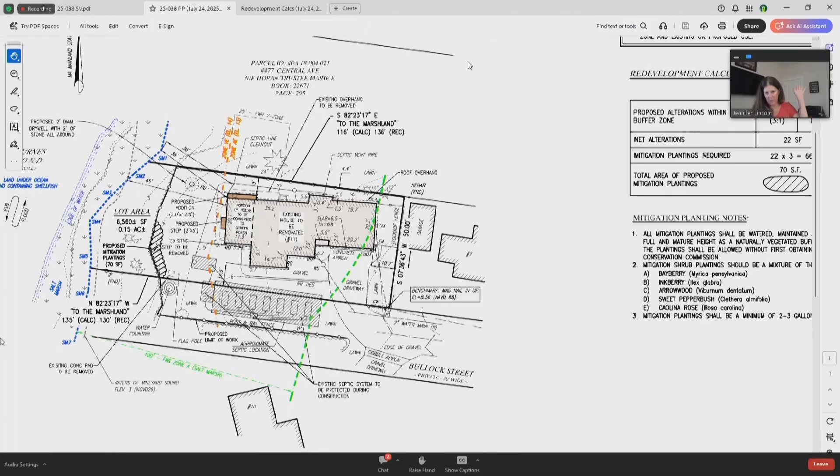And then they would be expanding it by 2 feet to the north. Yeah, I'm talking about the main house, Tim. Yeah, the main house, again, it's interior renovations and then siding and windows. Okay, no additional, no second floor additions to the main house. Perfect. All right, great. Thank you, Tim.

So right, we have the 22 square feet. You're going to do the tree for us, Tim. You described the renovations, and you have explained to your clients that...

I have explained to them that anything they do on this property needs your permission. Any hardscape, landscape, anything will be back before this board. I believe I did send in the email to you guys. They are working with an invasive specialist, so we'll probably be back in the next couple of months for an invasive vegetation management plan between the marsh and the lawn.

Yeah, I think our concern was there didn't seem to be any outdoor living space, patios, decks, and anything off that sunroom would be moving closer. So it would have to be relocated elsewhere on the property. Sure, not a problem. All right, great. Thank you, Tim. I'm all set, Mr. Chairman. Thank you. Thank you, Jen.

Steve, why don't you start us off with questions? Alyssa. No, it seems that they've resolved all the issues with the staff. My issues were whether or not the right of way had any impact on the property, but I have no other questions.

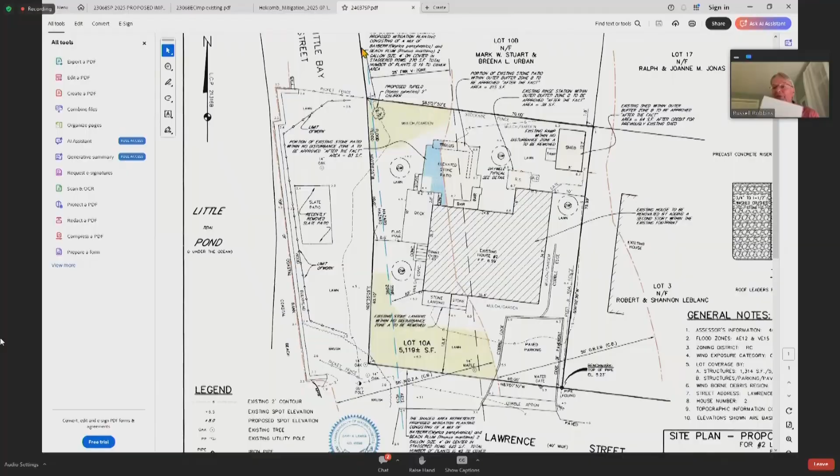Thank you, Mike. Jen: Yes, Mike, so you're gonna put the salt marsh on the plan.

You're gonna be really pressed for room for mitigation at that 3-to-1, but see what you can do for us on that. Have you had... so you're gonna take care and reorganize the mitigation from there? You've checked off all the only one you didn't address, Mike, was that structural engineer architectural confirming that dwelling can handle that second floor. Can you get something from an architect or engineer?

Greg Ceruni and Rescom is the architect. They have structural engineers on staff. They certainly reviewed that, and that would certainly be reviewed by the building department. But if you could just get us something, if they've already reviewed it and it's in-house, that would be great. I can have Rescom send you a letter. Just a quick letter. We do know the building department does that, but it has been a practice of this board to require that because there have been several instances over the years.

The chair and I were talking this afternoon about how we'll approve something and then next thing you know, it goes to the building department and a new foundation is needed, it's not structurally sound. The next thing you know, the houses are cribbed up or taken down and we're not part of that conversation. I do remember one specifically where we stopped the project because they were pouring a new foundation and it was delayed for several months. So we just kind of want to avoid that if possible.

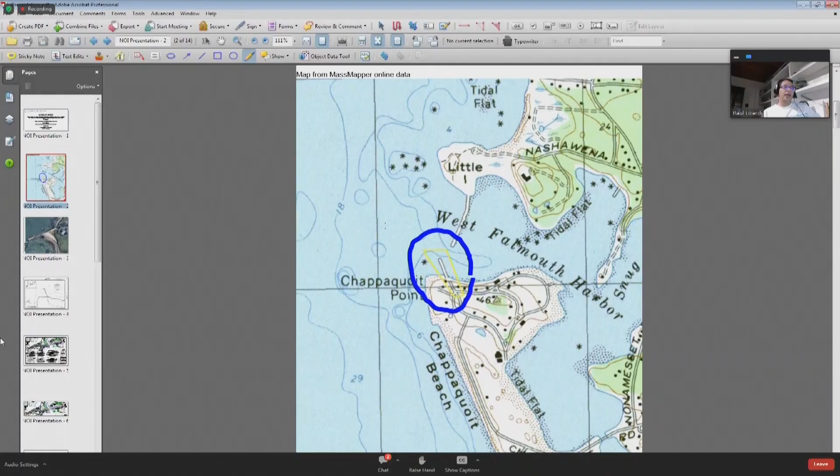Most of you, if not all of you, are familiar with Chappaquoit Island. On the northwest corner, jetting towards the north, is what the neighborhood calls the Big Pier. It's a stone pier that jets into West Falmouth Harbor, and in tandem with a jetty off of Little Island, is kind of like the gate between Buzzards Bay into West Falmouth Harbor. From an aerial image, this is what that pier looks like.

Associates Road is that way, and this is the easement or way, the actual way to get to the pier. The pier itself is on this property, which is 20 Associates Road, but there is an easement over that portion of the pier for the benefit of the association.

The pier is one of the oldest licenses that I've been involved with. This license dates back to 1891. When that wharf, as it was called at the time, was proposed, it was proposed as a T configuration. The T has a core of granite cut stones, and on the westerly side it has a pile of stones to protect the pier.

So this application was filed as a notice of intent to re-permit, to allow the reconstruction of the stones, not the pier itself. To our knowledge, this pier has not had a major reconstruction of the stonework.

I have been involved in the past, through prior commissions in Falmouth, with improvements to the concrete cap of the main pier, and with introducing some mortar on the south side of the pier to seal it.

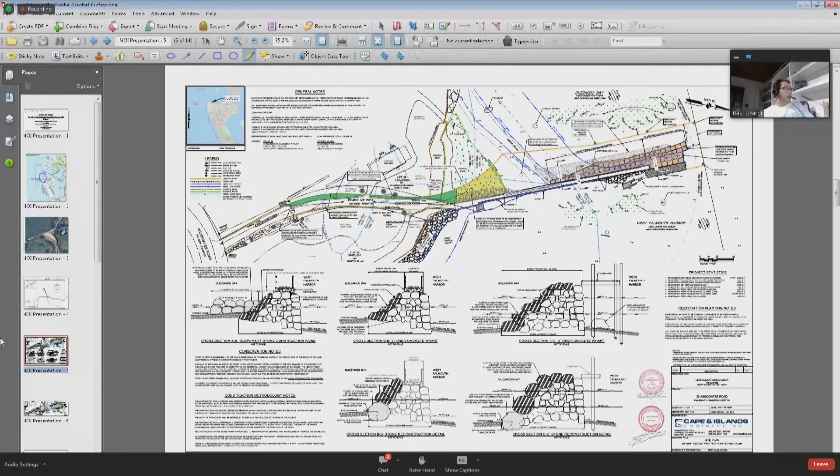So those projects were in the past. What we're doing now is the reconstruction of the actual stone, and I would like to share a couple of photographs of what that stone looks like.

So I met on site with one of the contractors that is likely to do the work, CF Briggs, and I know that's one of the questions staff had. When we met on site, what we found is that most of the stones that make up this face, the outwardmost layer, are kind of on the small side. There are a few larger stones that are the typical size we like to see, but most of them are on the smaller side.

And what this has caused is that when the sands at the bottom of this stonework leave the site and over time come back, some of these stones have been shifting, falling off of the revetment, and in some cases the ones that fell off have rolled over to the east side and collapsed or broken up some of the piles that hold up the timber pier.

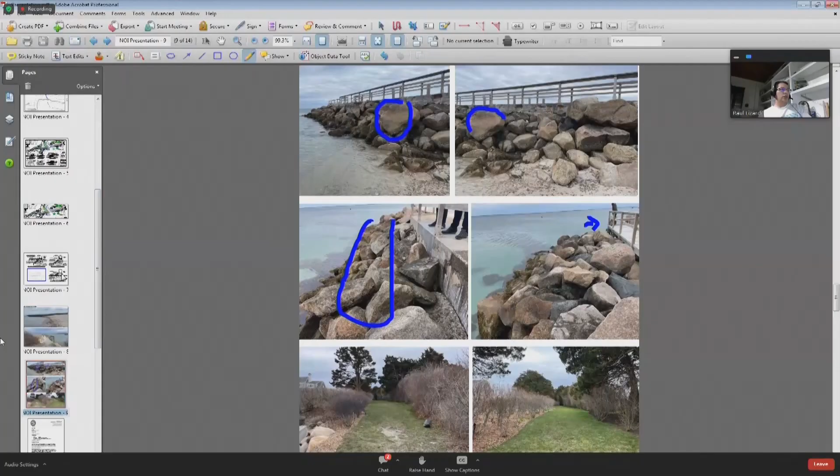So those type of repairs have been before prior commissions already. What we want to do is, I believe for the first time, reconstruct this outer layer. The reason I keep calling it the outer layer is because the core of this wharf or pier, the cut granite stones, are mortared in place. There's concrete with them. So if I switch over to the cross sections, this is what we call the core of the pier or wharf.

There is concrete that connects these stones together. So one of the things we don't want to do is remove the stones that are cemented in, so as not to affect the stability of the pier. What we want to do is remove the outer layer.

What this revetment does not have is a proper toe stone. Similar to a revetment along the shoreline, what we want to do is bring in 10-ton stones and set them below grade all along the length of the site. The site in question is roughly 170 feet from this section to this section.

All of this work is happening within the coastal beach, land subject to tidal action, land under the ocean, and land containing shellfish. We did have an eelgrass survey done. Eelgrass was found and mapped on the plans to the west, and then to the east down here. No work is proposed on the east side of the pier. All of the work is proposed on the west side.

I met on site, like I said, with CF Briggs, who is the contractor we believe will take on this job. One of the alternatives we're looking at is doing this work by barge. They expressed that barge construction would be very difficult, limited by the tides and by some outcrop stones in the area. So the preference for this work is to do it by land.

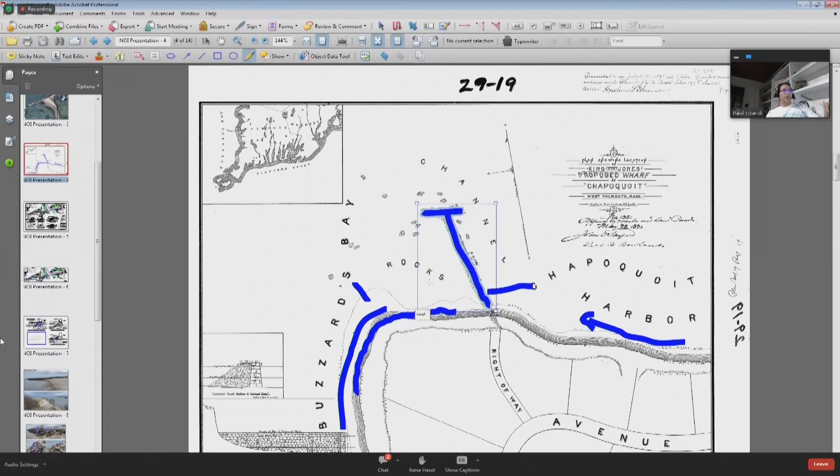There was a question about whether there's any other alternative to access the site. Looking at the overall plan, those who know the site know this whole shoreline is practically a revetment, just stacked up stones. The shoreline is littered with natural outcrops and stones all over the beach, so access through that is almost impossible due to the stones and the tides. Access from this side isn't possible either, since it's almost all underwater up to that point on the pier, and jumping over the pier to reach the same location seems impossible.

The option of using a barge is also difficult, because of the outcrops on the water and the tides, making it time consuming to achieve solely by barge. So the methodology we propose, I believe, is the best approach, and I hope this commission finds that to be the case.

Another item I'd like to point out: just off the northern end of that revetment and pier, there are mapped habitat areas for endangered species. This file was sent to MESA, an application was submitted, and we received a response determining that this project will result in no take of habitat for endangered species.

Another question was who the contractor will be. No contractor has been assigned yet, but I believe it will be CF Briggs Marine Construction. They've done other similar work and are the ones I met on site to review this project and the methodology, so I believe they'll be the contractor who eventually gets this project.

Another question is how long this project will last. I didn't get a direct answer from the contractor, but based on other revetment projects I've been involved with of roughly 200 linear feet, we can expect about 4 weeks for this project. The restoration of the plantings will probably take place within a couple of weeks. If there are any questions, I'll try to answer.

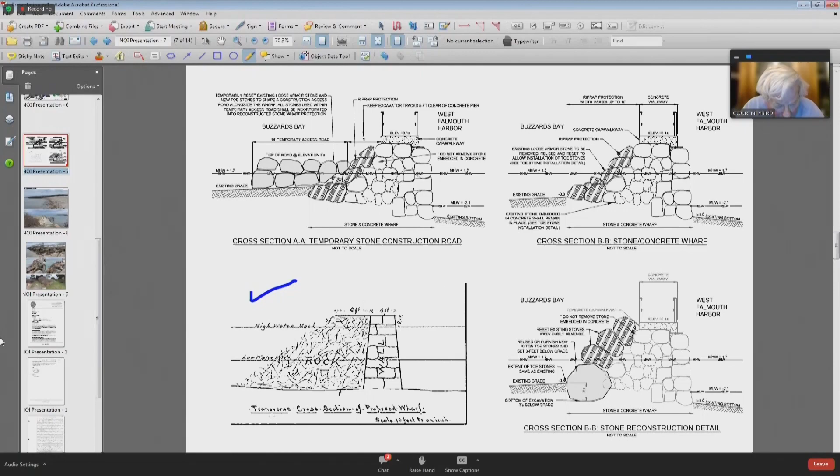You notice that the rock, it seems, unless it's a problem of scale, the rock that was designed there seems to extend further out from the mortared section than what you're proposing. Is that problematic?

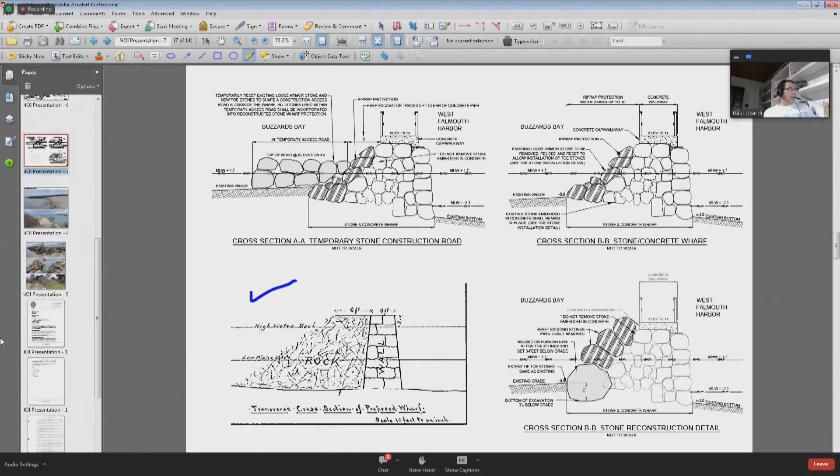So I will switch over to the plan view because maybe it will be easier to illustrate here. Yeah, okay. So what we noticed when I was on site, and I mentioned that I was doing my own soil borings...

That plan from 1891 showed that this stone was actually built through the entire length of this pier. So one of the things I wanted to find out is if I dig a hole at this location, am I going to be hitting stones? I found out that I was not. I dug myself a test pit about 3 foot deep here, and I did not hit any of these stones. I did another one in this location, and I did not. Now, I do know when I worked on the dune 10-plus years ago, when the dune was scraped off, we did find stones here.

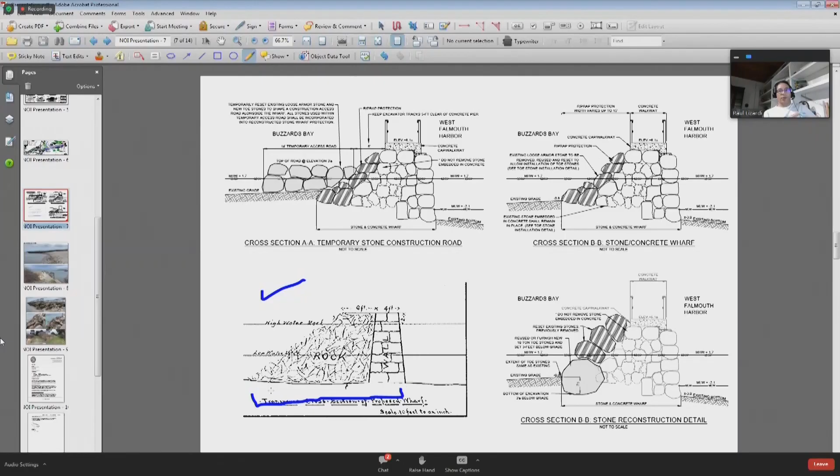Right. So one of the things we want to do, and we reached out to DEP Waterways - this is a licensed structure from the 1890s, and they say so long as you don't project any further than the existing row of stones, kind of like the water-side-most extension, then they'll be fine. And so that's what we're doing here. So even though what was permitted kind of resembles something much larger, it may not have been what was constructed. I know for a fact that it wasn't constructed per plans, but we just want to stick with the footprint that we have today.

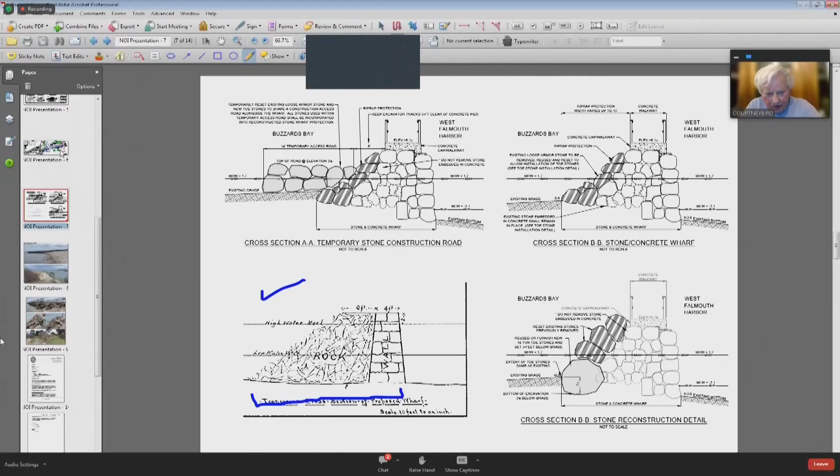Okay, now if you could go back - I'm sorry, if you could go back to your plan for a second. Not the cross-section view, but the overview, yes. So where that beach is - yeah, essentially in that area, I don't see a row of stones continuing from the buried stones to the actual thing. Is that right, that area, and maybe on the other side - is that going to be problematic down the road?

So what we have noticed is that when this wharf was licensed, proposed, and constructed back around the turn of the century, this beach did not exist. So the shoreline was a straight bank all along here. So this has been building up. We don't suspect that this is going to change. We do know that as seasons go, some of this sand kind of goes into the water, and then the season retreats and the sand comes back. So we know that process will still remain.

So I think protecting this corner over here with additional stones is not a problem, just because it hasn't been a problem over the past, I guess, 100 years. No, I don't want to make more of it than I have to.

So my final point, because we're going late here - one of the things that we used to condition for these projects: you're going to be using a lot of hydraulic equipment down on that beach, back and forth, and we all know there's a potential for hydraulic lines to burst. In some of the projects we've approved in previous years where you're bringing down equipment like that, we've required that the hydraulic fluid be like a vegetable oil. And I think that's something we should condition.

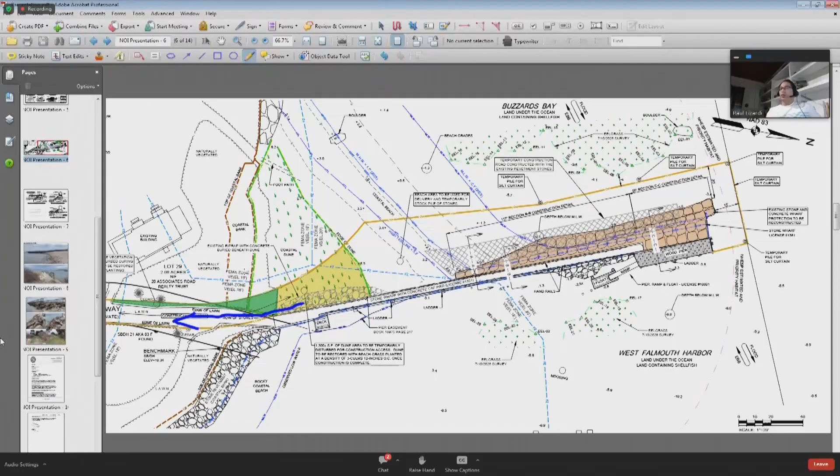Okay, you've answered my questions. Thank you. It's a detailed project that requires a lot of detailed planning, so hence my questions. Thanks, Court. Steve.

It's one of these remarkable projects, 1891. I don't know where the other side comes from, but the pier appeared to be in good condition. I appreciate the association addressing this. I think it's an important tool for the harbor.

I am worried about the width of the access road, but nobody else seems to be, so I imagine you can navigate down a road like that. If you could put a 14-foot mat down, I think it would help. I'd find that amazing that you could find the 14 feet, but if you can do it, that would certainly take care of a lot of the issues I was concerned about. So that was good to throw in at the end, Roel. I couldn't imagine you had anything more to add, but there you go.

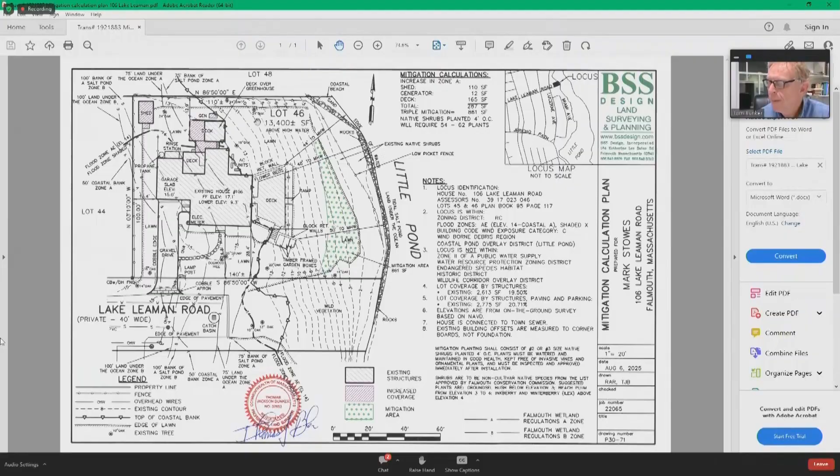Can you see the screen here? Yep, I have dual screens, so I couldn't quite tell. So on Lake Leaman Road, you have this property at the end of the road. It fronts on the east side on Little Pond, as you can see. This house has been there for a long time. There was a plan done in the 70s or 80s which showed the existing conditions of that time.

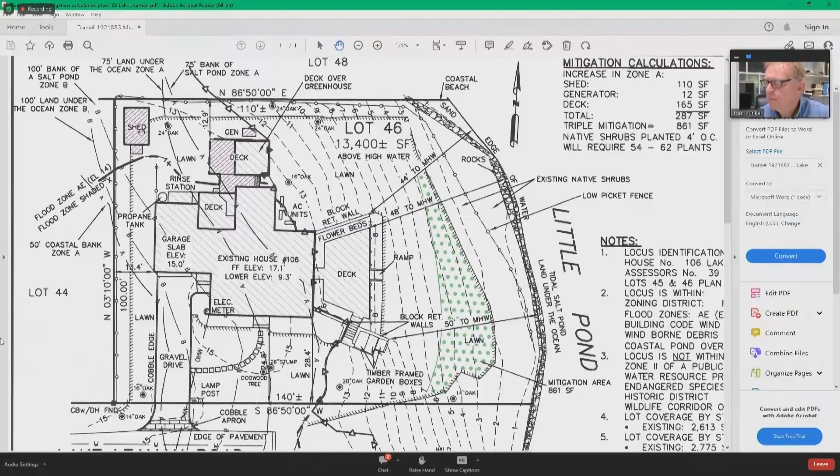That plan did not include this shed, and it had what was called a greenhouse. The property got sold, and the current owner has put up this shed, increased the size of the deck - it's a raised deck, sort of on top of a low greenhouse - and the deck that connects to the house, and the generator. So you have all of this added coverage.

The property is in a flood zone up to elevation 14, and the property goes up and levels off some. We have a coastal bank that runs right along here, a 50-foot setback from a coastal bank that borders a wetland. Zone A includes basically all of the lot, so being in Zone A, it's triple mitigation.

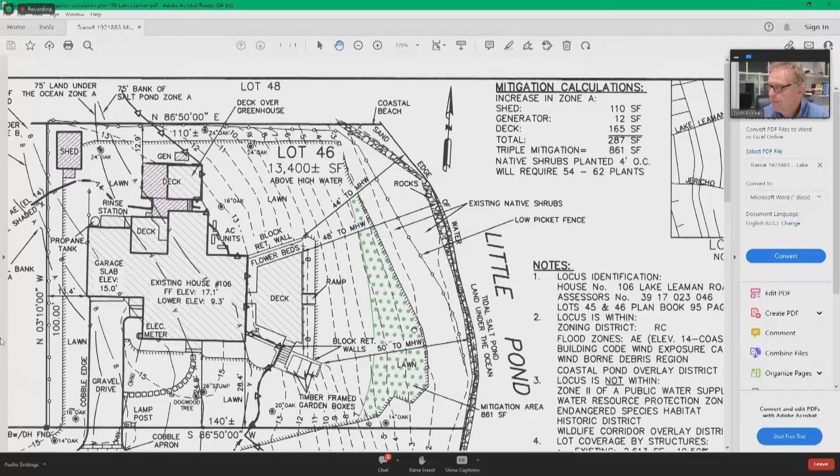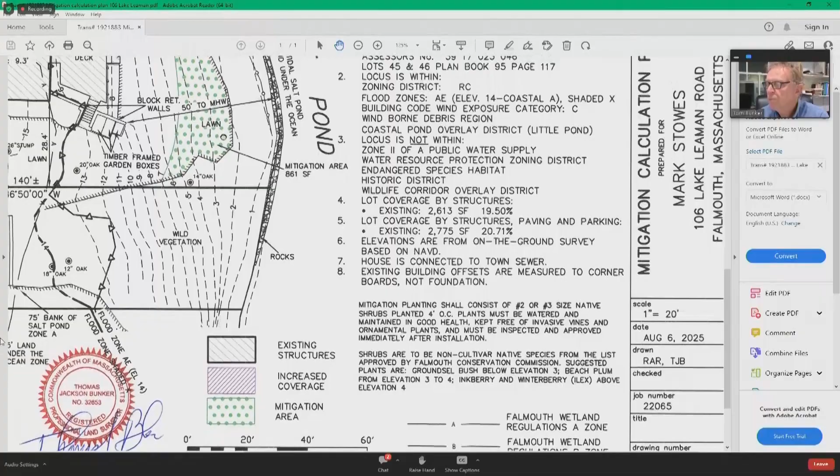You have the calculations here - there's a total of 287 square feet of increase between these items. Triple that, 861 square feet of mitigation, which I've put down along here in the closest area to Little Pond. There I called out, they require 4 feet on center, 54 to 62 plants, in rows parallel to the contours, some groundsel.

Down below elevation 3, right along the edge of that - I believe there's groundsel growing in this area already, so I had a little more of that. And then suggesting also beach plum, inkberry, winterberry up on the higher elevations here.

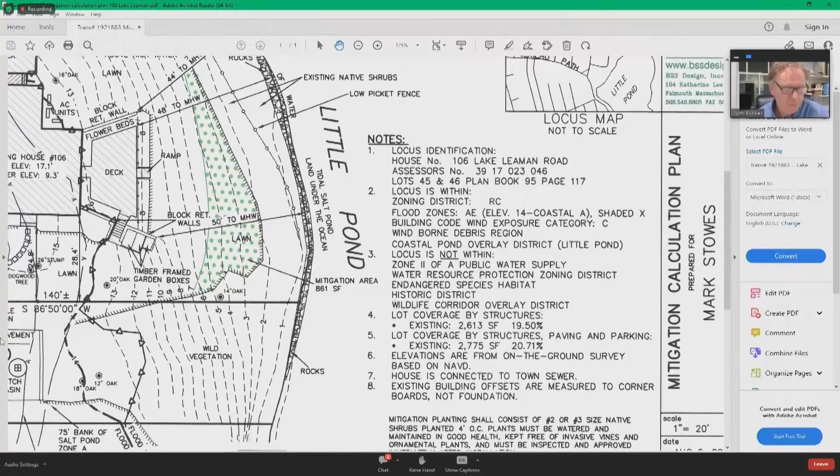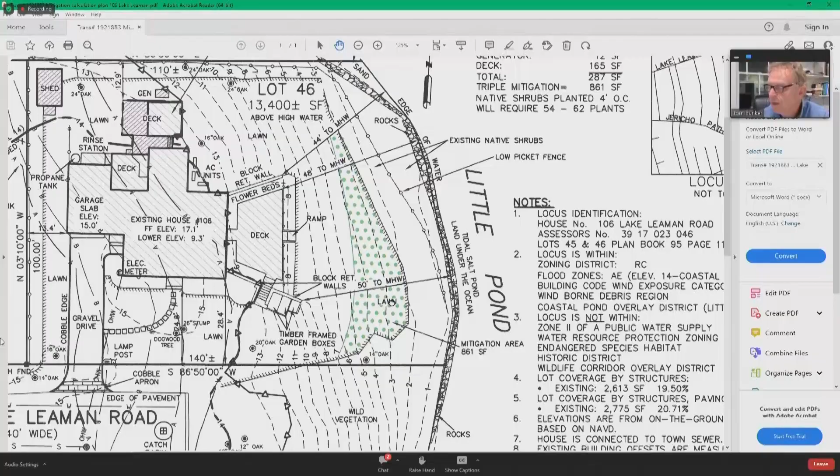The staff report suggested we add a tree. I talked with Mark Stowes, and he's fine adding a tree to this. If I could suggest that at the time when planting comes, we don't have to decide on the location or species at the moment - we could do it then, which I hope to put in this fall, and see which of these plants they can get. I think there might be some substitutions, but whoever's doing the work, Mark or someone he hires, will get a planting plan approved by staff, and at that time they can look at the tree and which tree and where it goes. So that's what we're doing.

All right, Tom, thank you. Jen: No comments, Mr. Chairman. Okay, we'll start off with Ronnie. No comment. Dave? Sorry about that, it seems very straightforward, no comments. Bill? No comment, Mr. Chairman. Courtney?

I have no comments, I think you've covered your ground, Tom. Although tonight's word is penance - there's some after the fact stuff that you're getting approval for now. I'd like to see another tree. That's my only comment, other than that I think it's good.

Okay, Steve? No comments, Mr. Chairman. Thank you, good plan. And Ron? Yeah, Tom, you're going to keep access to the water, somewhere - is it marked on there somewhere? Yeah, well it's very up at the northeast corner, there's a little bit of sand. The lawn is very near that sandy corner, so we're not planting in front of it, and I think if anything that's where they would or do access it now.

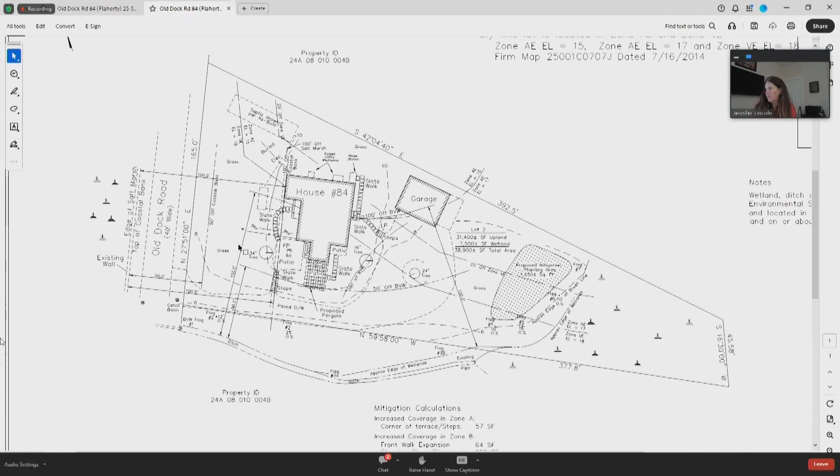Within the 100-foot buffer of the salt marsh over on this slope, we would like it conditioned to be some native shrubs, to bring some of that wildlife habitat back. Those absolutely can be conditioned, and I do agree there should be some sort of mow strip behind the mitigation, because it is a pretty large stand of Phragmites that will just overtake them. Providing that mow area behind it is something we've seen in the past.

That's all, Mr. Chairman. Thank you, Jen. Alyssa? Nothing to add other than the quorum, which is Courtney, Ron, Russ, and Ronnie.

I'm sorry, Mr. Chair, could I make one more comment? I believe staff wanted to have some of the patio removed. I'm wondering if, because that driveway is all paved, maybe there could be a corresponding 2-to-1 or 3-to-1 ratio of the impervious driveway removed and replaced with crushed shell, so they don't have to take out rows of patio. Would that be something you'd consider?

It is moving closer to that top of Coastal Bank, Mr. Chairman. That's right on it. But that's something you can talk about in deliberation. It is a very minor area, but again, this board has required somebody to move one step before. Yep, I understand. But Mr. Flaherty, that's something they absolutely can deliberate. Okay, thank you. Not a problem.

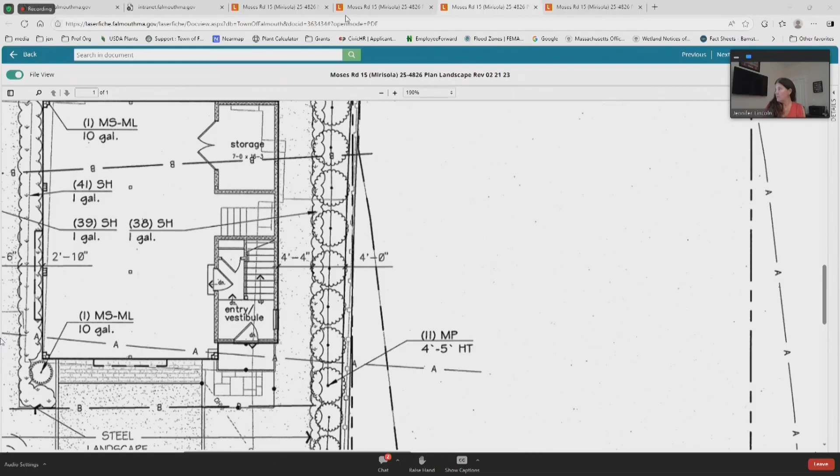Yeah, so I said don't quote me on the 200. I went to the maximum allowable by you guys and the building department. I didn't get any more or less than... oh, I did, as far as I was aware.

I think, Mr. Mirisola, the board expected a little bit more from this hearing from you, as far as design goes. So what I would suggest is going back to your builder, coming up with some sort of design for this board to consider.

Or as Ron said, we can take the whole thing down, and prior to you putting anything else up, next season. Mr. Chairman, how would you want to handle this? Do you want to just keep rolling this down, or?

I think there's been some good suggestions here by members of the board about some sort of design. I don't know if you need an engineer. Could a builder sit down and lay the thing out with hooks, measurements, some detailed drawings?

I think from what I'm hearing, that's what the members are looking for. I think a builder or any other type of professional could come up with something. I don't think we need to contract an engineer. I don't think Tom needs to get involved with this.